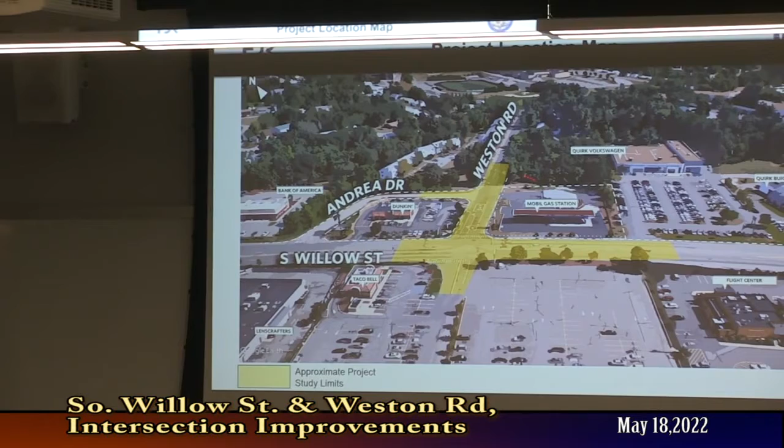What have we done? We had notice to proceed in October 2021 from the city. After that, we collected a bunch of traffic and collision data in November, and that is not correct. That's a year off, so that should have been November 2021 where the environmental letters went out. Apologize for that. The survey was completed in December of 2021, and then we held our local concerns meeting where we first met a lot of you folks back in December of 2021.

We have been pretty busy since then, collecting and analyzing data and speaking to folks in the field. As you can see, from January through April and into March, we met with some city folks to talk about drainage and requirements for drainage. We met with utility companies a couple of months ago in March out in the field, and we've had a number of abutter meetings where we've taken plans and we've gone and met with folks just to talk about their concerns, circulation on their sites, and how we might be able to improve the overall intersection operations. And we developed the purpose and needs statement last month, and tonight obviously we're here for the second public meeting.

So here's where we are in the project development process. We started out collecting traffic data and survey data. We solicited input in the local concerns meeting. We've crafted the purpose and needs statement. We've already developed a range of alternatives that we're going to share with you tonight. We've begun our evaluation of environmental impacts. That's going to continue in earnest after tonight's meeting, when we have a pretty good idea of what direction we're heading. And tonight we're going to receive public input on those alternatives. And after this, we'll be finalizing the recommended alternative to move forward into design. And we'll be looking for approval from the city and the state to move forward with that pending tonight's meeting.

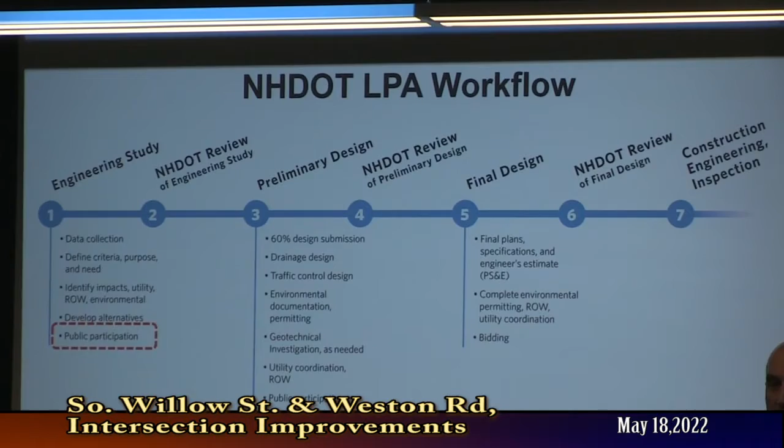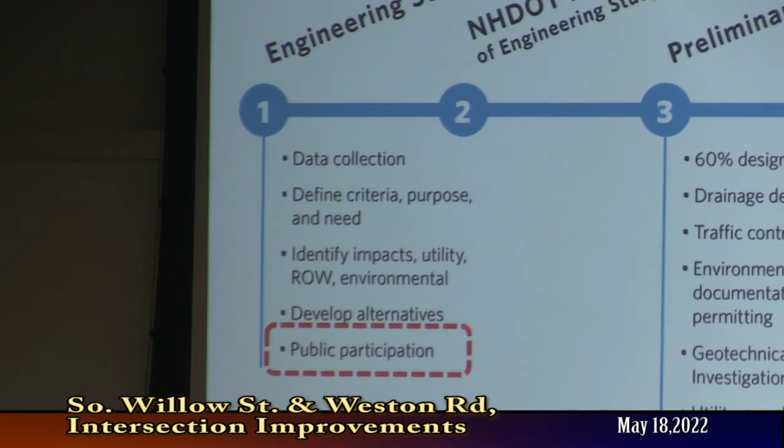This is the typical workflow. I think I shared this with you last time we met here. So this is as dictated by New Hampshire DOT and Federal Highway through their process. We're over here at the engineering study phase. These are all the different steps that we need to get through before we can actually build the project. So right now we're down at the bottom of the engineering study where we've done all of the studies, we've run through the analysis, we're developing a final report that's going to be submitted following this meeting tonight. And then we will be looking for approval of that engineering study before we move to preliminary design, which would be the next step where we really start putting pen to paper and finalizing the details of the project. What's the tentative schedule? We'll get to that. Okay. Thank you. So we're here right now.

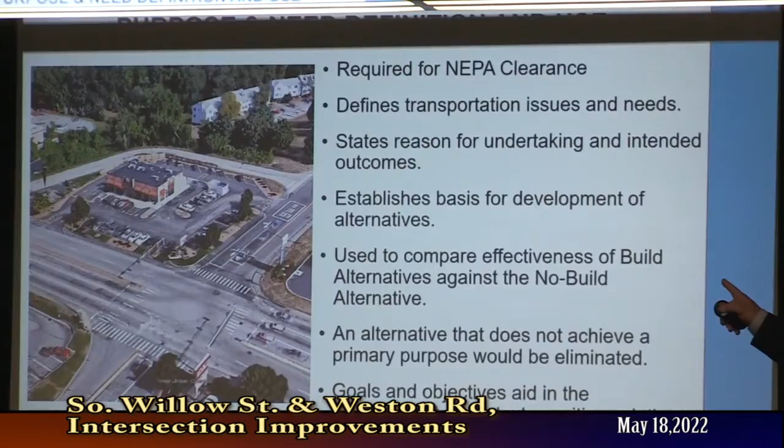So the purpose and needs statement that's been developed, this was developed in concert with the project team and the state regulators. You kind of get blacked out up at the top, but this is why a purpose and needs statement is required. It's required for NEPA clearance, that's the National Environmental Policy Act. So this is all dictated by some steps that we have to go through to get permits for the project. It defines transportation issues and needs that you all experience out there. And the purpose and needs statement states the reason for the project and what the intended outcomes are supposed to be. It also establishes the basis for alternatives. We just can't define what we want to build out there based on what we want. The alternatives that we select are really based on how it serves the public, how it serves the need, based on input from you all and the analysis that we're doing.

The purpose and needs statement is also used to compare the effectiveness of the build alternatives against the no build. We could do nothing, and that wouldn't change anything out here. The intersection would still operate like crap, and you wouldn't see any benefit to that. An alternative that does not achieve the primary purpose would ultimately be eliminated, and there is at least one of these in the set that we're going to show you tonight. The goals and objectives aid in the development of context-sensitive solutions. What does that mean? It helps us to find something that fits within the context of the community that we're serving, you all folks.

If you remember, this is a slide that we pulled out of the original presentation. The goals of this project were driven by the need to reduce air emission. If you remember, the funding for this project is coming through a CMAQ grant, Congestion Mitigation and Air Quality Grant, which the city was successful in securing from DOT and Federal Highway. And so the money is coming from them. That comes with certain requirements.

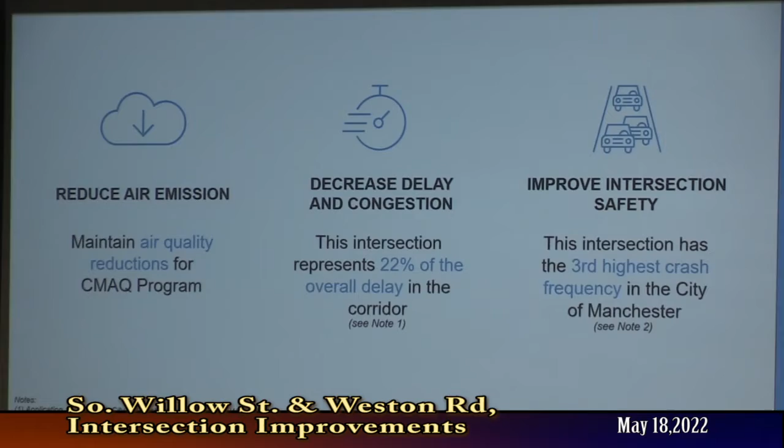That said, the city is also moving forward with another project that you may have heard about, and that's the Adaptive Signals Project, where they're making timing and signal changes all the way down South Willow Street to improve operations and traffic flow past the interstate and all the way up to Queen City Ave. Separate project, but we did have to consider it with this one.

And the outcome of that is improved intersection safety. As we improve congestion and traffic flow, the improvements to safety are there. We had to look at traffic analysis and crash analysis. You might remember last time we met, we went over the results of that and where a lot of the collisions occurred and reasons why. And so what goes into our design analysis is trying to find solutions to some of that. Largely, we answered a lot of those things with geometric changes.

So you might remember some of this. We took notes on a flip chart last time we met. We recorded that information and wanted to make sure that we brought it back here to identify what we're actually doing with it. These are the comments that were made in the last public information meeting. One of the problems identified was that the eastbound left queue on Weston Road at the Dunkin' Donuts driveway is problematic. Not enough green time to clear the intersection.

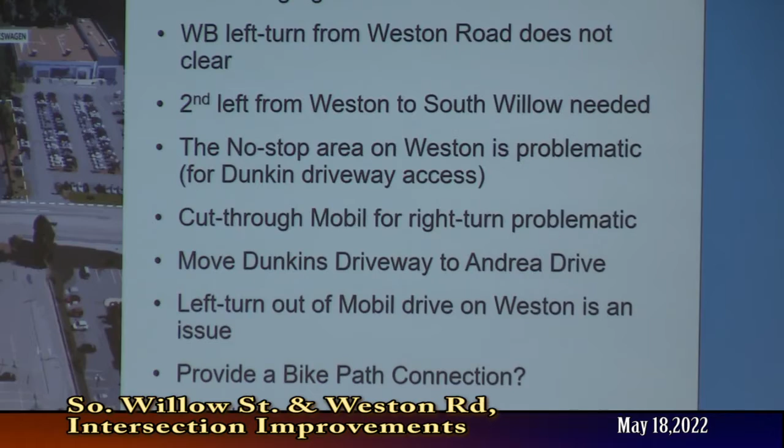The westbound left turn from Weston Road is not clear. So westbound, yeah, that's this one. And a second left on Weston Road is needed, so recommending a second left turn out of Weston Road here to help clear the traffic. That was one of the recommendations. Sorry, can you point to where you put that in? Right here?

This is the first meeting I've been to, and for whatever reason, even though we're abutters, we never got any notice. But anyway, so you've got the right turn lane going through by the Dunkin', and then coming off of Weston, you're gonna have a right turn lane, a straight lane, and a left turn lane onto South Willow, and then a left turn lane into the Dunkin's. Is that what you're talking about?

We'll go over some of that. We have some detailed plans that you can take a look at, and that information will also be made available on the city's website after this meeting, so you can look at it then too. I've got some detailed plans that will probably answer your questions.

But that comment right there was that in the meetings in the fall, people kept saying that we needed a second left off Weston Road to South Willow towards the highway ramp. So we were asked to look at how we can make it possible to get a second turn lane onto South Willow Street. So there would be two left turn lanes side by side? Yes. That was something we were tasked with looking at from the public comments.

What are you looking at, 6 foot wide lanes? These are comments that came from the public from the last meeting. We'll get to the alternatives that we looked at. Okay, yeah, go ahead. Thank you. The no stop area on Weston is problematic. This one right here, we have the paint on the ground in front of the Dunkin' Donuts. Yes. Nobody really pays attention.

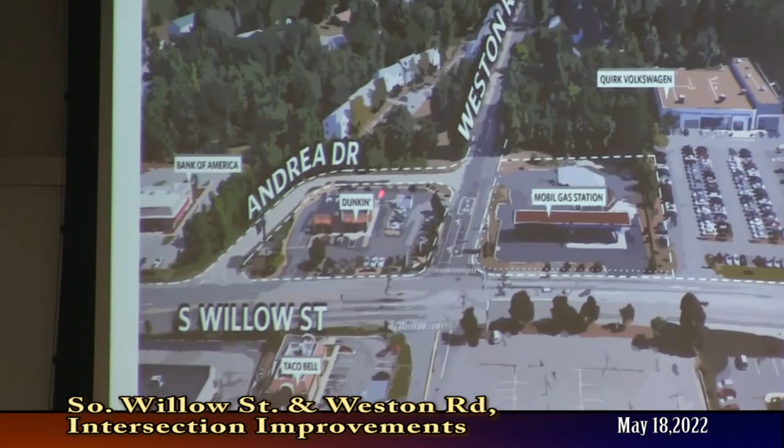Cut through the Mobil or right turn is problematic, so it's these people that go through the Mobil station. One suggestion was to move the Dunkin' Donuts driveway to Andrea Drive, putting it somewhere over here on Andrea Drive. This is a cut through that goes from Weston over to South Willow Street northbound.

Another suggestion was to make a left turn out of the Mobil drive on Weston. No, it said that that's an issue, so this movement, just the left turn out of the Mobil station, is an issue. Provide a bike path connection. Probably not something that we can address as part of this project because there really aren't any bicycle facilities on South Willow Street at all. And so to build something isolated at this location, it doesn't really serve a whole lot of function.

And if I can add a little additional context about the Mobil station with the left turn coming out of it. So we're in Brook Hollow. Okay. And I spoke to Roach. Did we speak earlier? Yeah. Roach? Yeah, okay. If I'm pronouncing your name right.

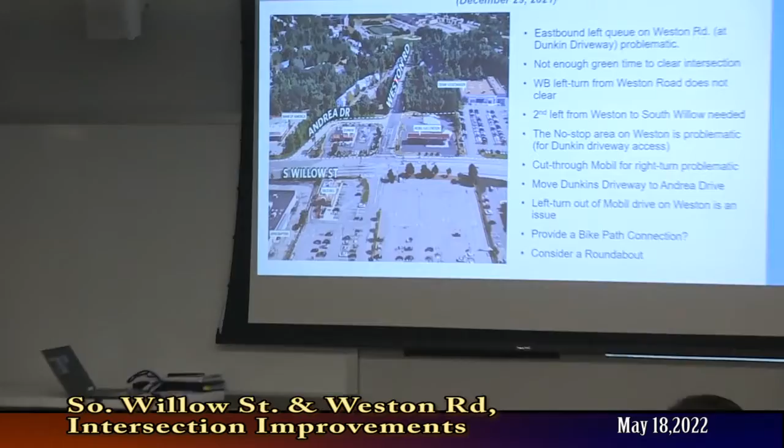Right, so people are making a right out of the Mobil and making a U-turn at our property. And it's quite a safety hazard. We got kids, they're coming in, they're whipping around in there because they wanted to make the left, but it's backed up. We've had one of our residents' cars damaged because someone backed into it trying to make the U-turn. And so we're taking steps to mitigate it ourselves with speed bumps and signage for private, no turnaround at the apron of our driveway. But anything that can be done to mitigate that would be greatly appreciated.

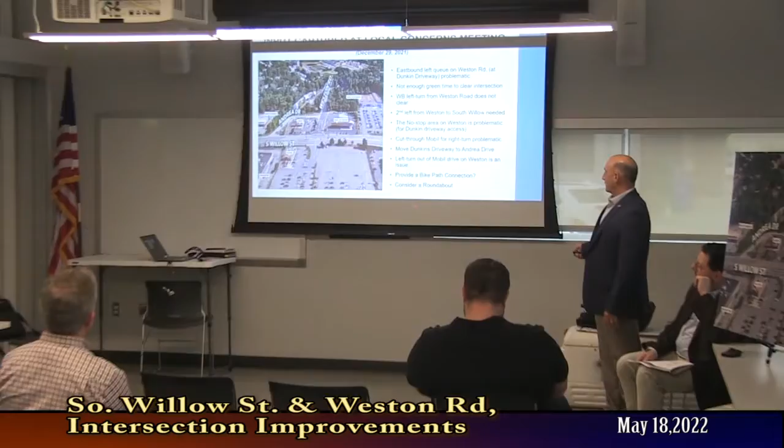No, and I appreciate that. I appreciate the conversation we had the other day about that. And consider a roundabout was one of the things that was suggested we look at for the intersection as well. So those are the comments that were received back in December. So those were all put in the queue, and we took a look at those as we went through our steps.

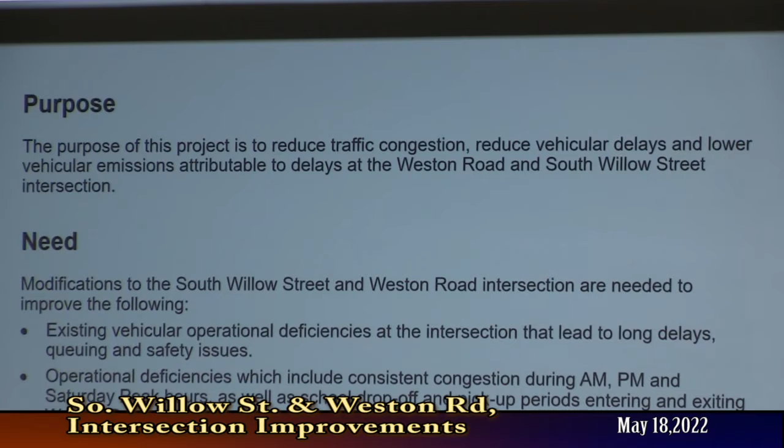So here's the purpose and need statement that was developed for the project. This will help guide us in our process along the way, and it's part of the requirements of the plan development process that we go through. The purpose of this project is to reduce traffic congestion, reduce vehicle delays, and lower vehicular emissions attributable to delays at the Weston Road and South Willow Street intersection. Very basic purpose that gives us our guiding principles, stemming from the funding that we have as well. The overall purpose of the project is to reduce emissions at the intersection. We do that by improving traffic circulation at the intersection so that people aren't sitting there as long.

The need is driven by: modifications to the South Willow Street Weston Road intersection are needed to improve the following: the existing vehicular operational deficiencies at the intersection that lead to long delays, queuing, and safety issues. So the need stems from the purpose. Operational deficiencies, which include consistent congestion during AM, PM, and Saturday peak hours, as well as school drop-off and pickup periods entering and exiting Weston Road. Lastly, congestion and delays attributable to increased vehicular emissions from idling vehicles. So that defines the purpose and need statement for the project. Kind of what we already talked about, what we laid out.

What you can't read up here, it's blocked out, is that these are some additional goals and objectives that were identified that aren't necessarily part of the purpose and need statement, but are obvious things that should be considered as we move through the project. So obviously, we want to improve the operational flow and decrease vehicular delay within the intersection. That leads to what we already talked about. We want to minimize project impacts on local business operations, natural and cultural environmental resources. It's a very tight area.

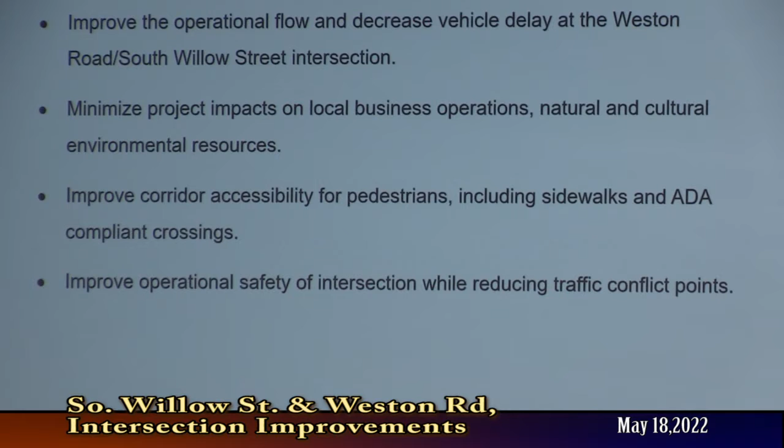There's a lot of businesses, as you know, from the Dunkin' Donuts to the Mobil station, the mall across the way, and Corcado. So our job is to try to do as much as we can within the right-of-way that we have, within what is owned by the city, work within those limits to the extent that we can, and make as many improvements as we can to the intersection while maximizing that space and minimizing costs. Improve corridor accessibility for pedestrians, including sidewalks and ADA compliant crossings. So that's part of the design. We're making some improvements to some of the pedestrian ramps, looking at the crosswalks. The signals that are going to be included, you'll see later, are going to provide some improved pedestrian crossings there as well.

Improve operational safety of intersection while reducing traffic conflict points. You'll see through the geometry that has been laid out, what we're trying to do is consolidate points of conflict, where right now you have the Dunkin' Donuts driveway, you have the Mobil station, you have Andrea Drive. All of these are points of conflict with multiple lanes that people have to cross over that result in a lot of the collisions that you see out there today at various severities.

So, to your point, your question, here's the alternatives that we're evaluating. So I'm going to show you a range of alternatives that we walked through. And on those alternatives will be a list of advantages and disadvantages as well that we use to evaluate them for viability as we walk through.

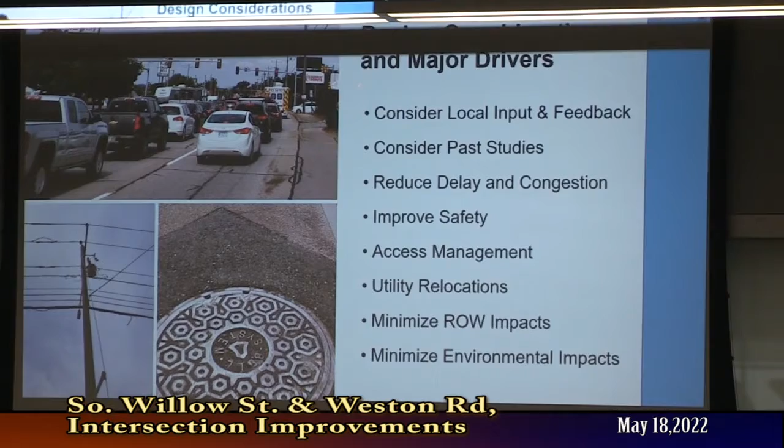So what do we use to evaluate the intersection alternatives? We're looking for local input and feedback. We considered the past studies. We walked through some of this last time we met. Reduce delay and congestion. We're looking for something that improves safety. Access management, what does that mean? How people come and go out of driveways, how they access the public road. That's access management. Utility relocations, we're trying to minimize what we're doing out there, albeit we are going to have some utilities to relocate. There's some poles that have to move.

Minimize right-of-way impacts. Obviously, we want to minimize any issues with the abutters out there and minimize what we're doing to impact operations of those businesses. And minimize environmental impacts. So those are the overall drivers of the alternatives that we put together and the things that we look at with each of those alternatives.

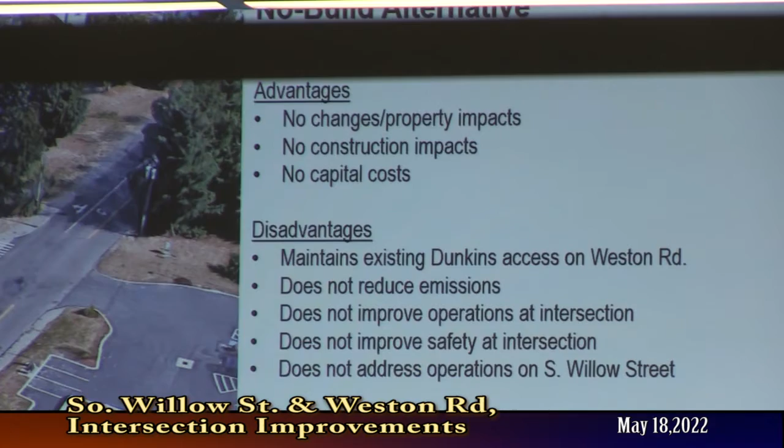So you can see up here, this is the no-build alternative. So what does the no-build alternative do? It does nothing. You would walk away, you'd have the same condition out there, but this is something that we have to look at. And we compare the alternatives that we're developing against the no-build alternative. So what you'll see later on in the presentation is we have metrics to define that. Traffic data, delay, queuing lengths, and we measure the no-build versus the alternatives and see how things perform. And that's part of what goes into selecting the preferred alternative.

So what are the advantages? No changes or property impacts. Yay, right? No construction impacts. Yay. No capital costs. Those are the advantages. What are the disadvantages? Maintains the existing Dunkin's access on Weston Road. Does not reduce emissions. Doesn't satisfy the overall goal of the project out of the purpose and need. Does not improve operations at the intersection at all. It would just continue to get worse as we go from 2023 to 2033 and beyond, and traffic continues to grow.

Does not improve safety at the intersection. So the geometry remains the same, conflict points remain the same, just maintain what you have. It does not address operations on South Willow Street at all. So again, that 22% contributing to the overall congestion and delay on South Willow Street, nothing would be done about that. So this is alternative number one that we looked at.

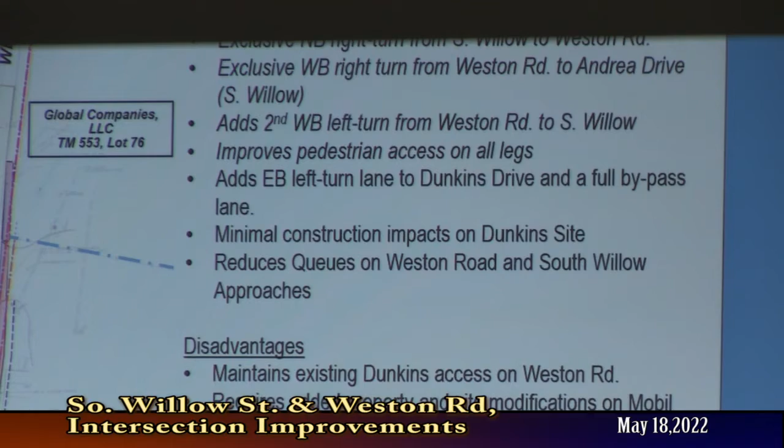I'm trying to figure out what the first one is. Exclusive right turn from South Willow Street to Weston. Thanks, Steve. That's why we print. Okay.

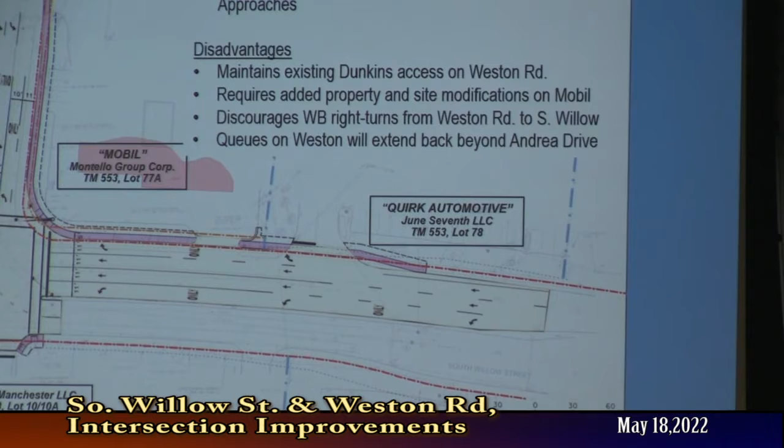So I'll explain a little bit about the graphics, and then this will apply to all of the alternatives. So you'll get an understanding of the color scheme that we have up here. Not always easy to look at, totally understand. Start with the red. So red lines, that reflects the public right-of-way. So that's the limit of what the city owns and what we define the parcels around Dunkin' Donuts. So you see Dunkin's here, that's the map and lot number. So that's the Dunkin' site. Blue is going to be the property line that separates the condominium property over here, Hollow Brook, from this parcel over here. That's the blue line, which is the property line.

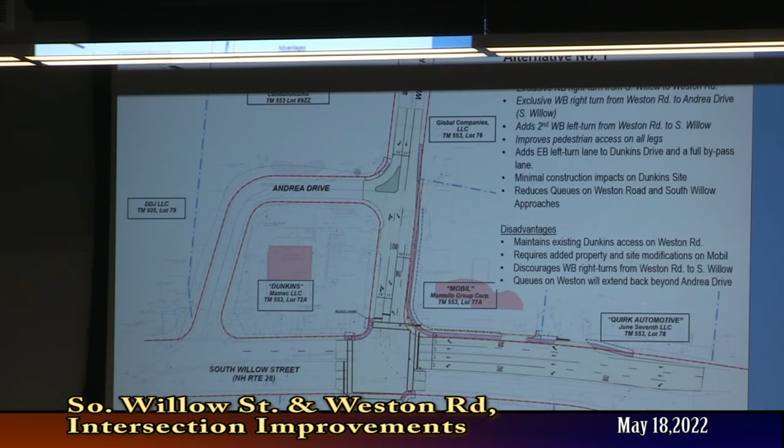Over here you have Global Companies and Mobil. I believe these are two in the same ownership. That's a property line that goes between these two parcels. Here you have this property line here, which is the split between Quirk Automotive and the Mobil station here. And then down below you have Centrico Manchester. This is the mall area. These two parcels are owned by the same company, and that's the entrance to the mall across the street, and the Taco Bell.

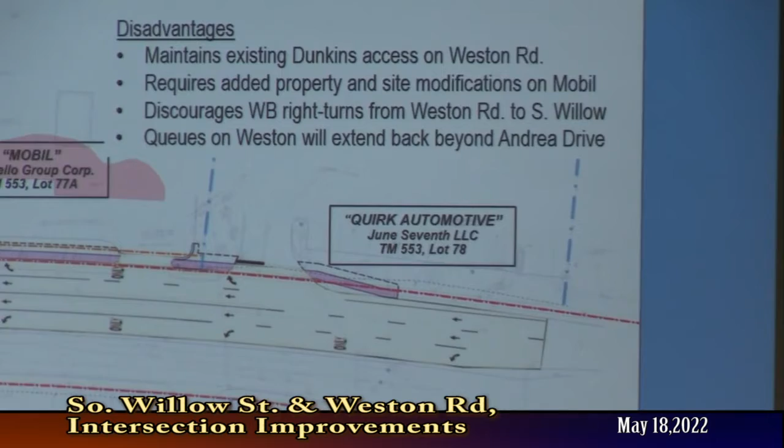And again, you have right-of-way in red here, and what might be difficult to see is there's also an orange line here that sits behind that, 10 feet behind the red line here, 5 feet behind the red line here. What that does is it defines an easement that has already been secured by the city from the Mobil corporation when they redeveloped this site. What does that mean? It's an area that is encumbered by the city for future widening of South Willow Street and Weston Road in this area. So that to us becomes something that we strive to work within. That land has already been dedicated for this future widening, so we're trying to work within those limits.

Green would be a raised island or an island. It could be like a concrete island, possibly flush, possibly raised. Haven't really gotten into that yet. Yellow is kind of a faint yellow coloring here. That would be new pavement, new asphalt, blacktop. So that really defines the limits of the project and what we would be resurfacing for the roadway. Then you see pavement markings here, arrows and onlys. So you see lane use here that would define where cars go. I'll get into a little bit more on that.

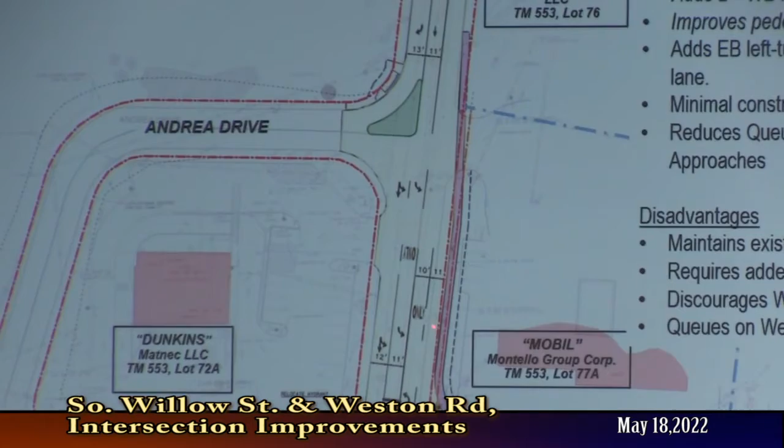Purple along this side would be a reconstructed sidewalk all through here. So you can see it flanks the other side of the new curb line for the roadway. And you also see purple over here on this corner. So we'd be looking to reconstruct that corner ramp system and actually separate that crosswalk from this crosswalk to make it a little bit safer. We really like to stay away from putting them on the corners like this, because as vehicles go around the corner, it's not very preferable from an ADA perspective. So we'd be improving that ramp there, that ramp there, that ramp there.

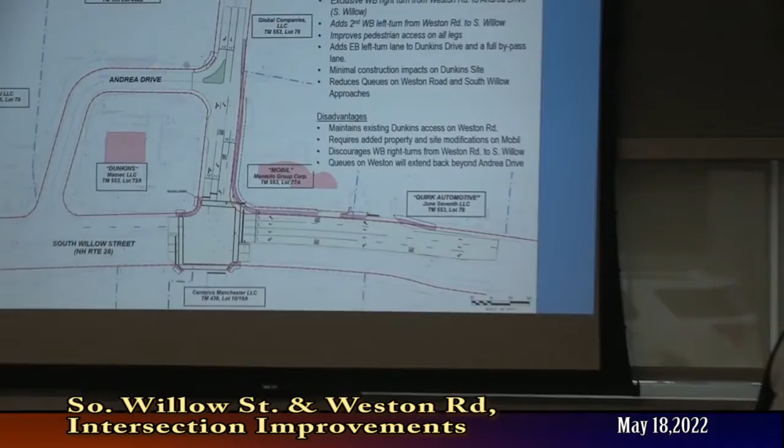And then obviously you have the public right-of-way on this side of South Willow Street, and we're not really doing anything at all over here on this side. So this would be all new pavement here and here. Questions on that before we go any further? This is really going to apply to all the alternatives, so I'm not going to spend much more time talking about color.

So, it's hard to see it in the plan. It's the only egress to Dunkin' Donuts now over Weston. It's also South Willow, you can go in. The Dunkin' Donuts wouldn't change in this alternative? Yeah, both of their driveways are still there. We'll get into what the improvements are associated with this. That was really an overview. The red here are the buildings and the canopy for the site. So this is the Dunkin' Donuts building, and this is the canopy for the Mobil site, just to orient you a little bit more.

Under this alternative, I already forgot. What's that first bullet? Exclusive northbound right turn from South Willow to Weston Road. Am I crowding?

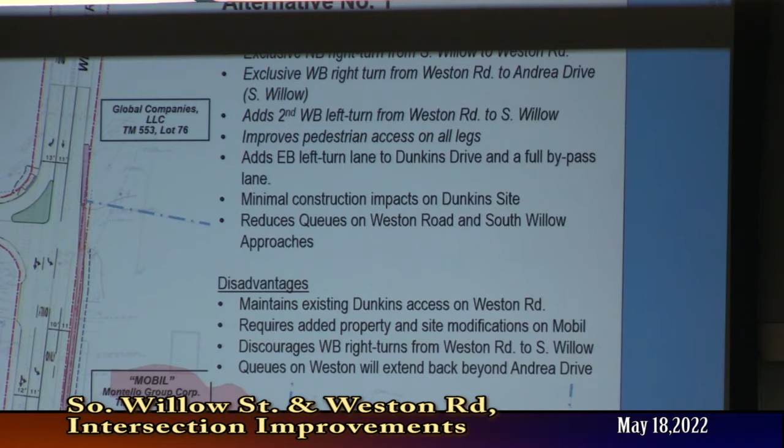So all of these alternatives have some things that are common to all of them. In all of the alternatives, there is a westbound right turn lane from Weston to Andrea Drive. I take that back, not exclusive. In this alternative, there's this exclusive right turn lane from Weston Road to Andrea Drive. The purpose of that is to pull right turning traffic out of this intersection here and to push it to this intersection here. Why would you do that? It pulls vehicles out of the intersection, improves delay, improves operations of the signalized intersection here, forces them onto a road that is highly underutilized at this point. It's really just a U-turn cut through for local traffic. So that's one of the things that we did.

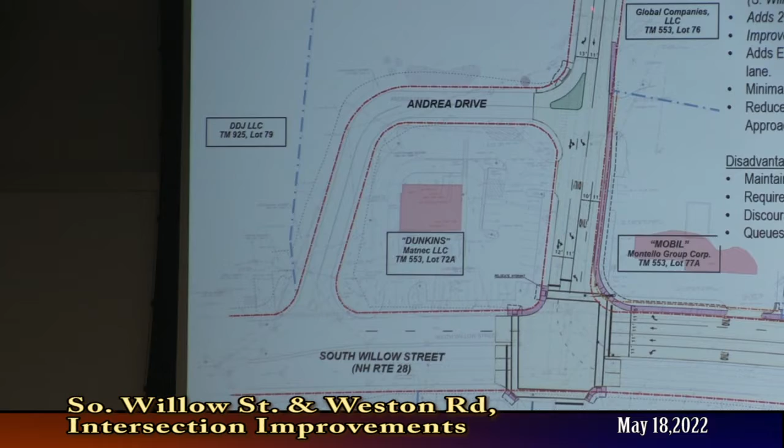We can do this because we have 2 lanes approaching on Weston Road this way. So it would actually be signed up above towards the condominiums for people to take that right turn, split the traffic, and then you have a single lane coming through here that would then open up to 2 lanes here that would ultimately make 2 left turn lanes onto South Willow Street here. So that's how we get the 2 lanes to work. We do that without impacting the sidewalk on the Dunkin' Donuts side.

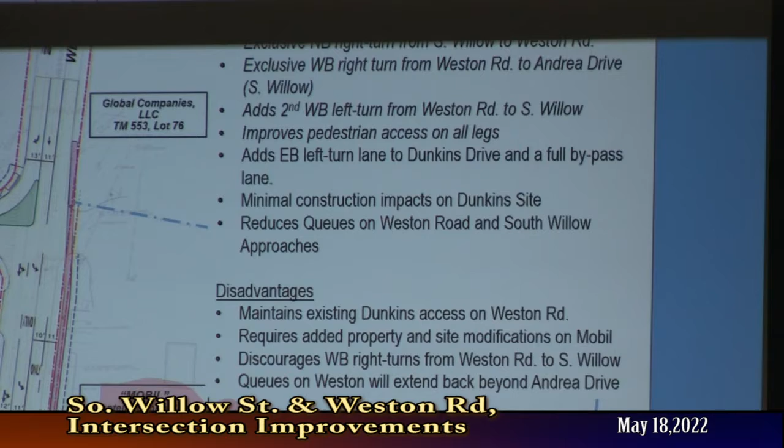Where the Brook Hollow condos are, how far back would you have to take the land to create the exclusive right turn lane? We're not taking any land. So it's just that corner in front? We're working within the existing roadway in that area. We'd basically be restriping what's there, not touching the curb line at all. And then what about the opposite side? It looks like you'll be taking a little bit on the opposite side? Yeah, you're way ahead of me. Okay, so.

Just trying to understand, because people already do make 2 lanes out of that as is. So this would be formalizing an action anyway. Yep. It's a good idea. All right, so 2 left turn lanes.

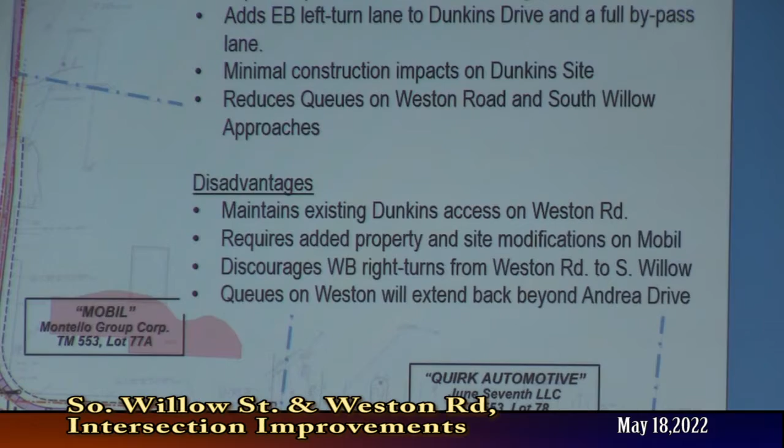This alternative has this formal right turn lane here. Right now you don't have a right turn lane making that right from South Willow onto Weston Road. All the alternatives that we're going to show you have this same option here, or not an option, but we'd actually be widening the road along the Mobil station property here to add a lane, an 11-foot right turn lane, so that you could unimpeded make that right-hand turn. And that pulls that traffic out of the 2 through lanes here on South Willow Street as well, and helps move traffic through the intersection, further reducing delay.

So in that case, there is widening along this side of South Willow Street. We would build a sidewalk behind that new curb line as well. And there would be the need to move utility poles on that side as well. There's a couple of good-sized utility poles up there. We're looking to move those back. And the permanent work would be done within the easement that I talked about earlier that is already secured by the city of Manchester. Back to the property line here.

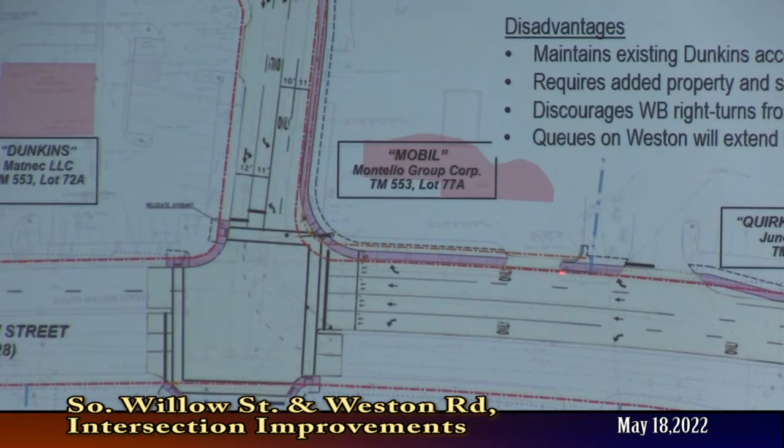This alternative and all the others also carry that right turn lane back onto the Quirk property. And you can see in this area here, we would actually be working beyond the right-of-way, that red line, and that would require an action with Quirk, for the Quirk property to actually secure some property rights in this area here to make that happen. So there'd be a minor adjustment to the curb line into this driveway access here that I think is largely an egress and exit from Quirk. Let's see.

On this side of Weston Road, this proposal keeps the Dunkin' Donuts driveway where it is, so it wouldn't change the Dunkin' Donuts driveway at all. But what this alternative does is it provides a left turn lane into the Dunkin' Donuts here and a bypass lane from that. So if somebody's waiting to take that left turn into the Dunkin' Donuts, it'd be another lane where people could drive right by them and keep going. So that's the intent. And beyond that would be the purple sidewalk over here.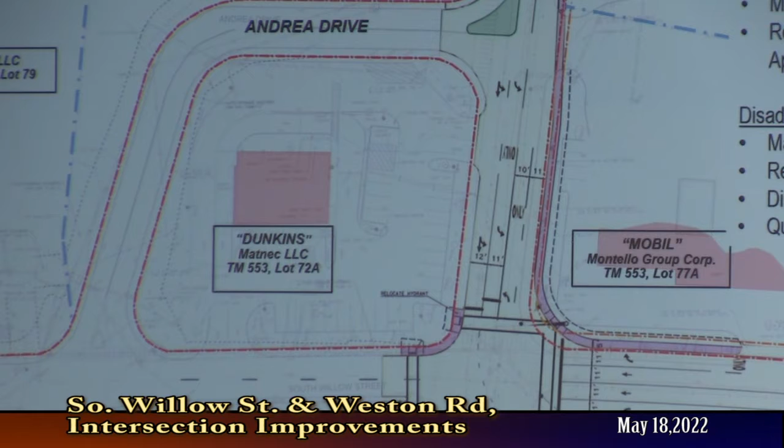The distinction of this one is that with the additional lane here, your instincts were correct, you need to look at purchasing additional property here beyond the easement that's already been established on the Mobil property. So it'd be more widening that would exceed the available right-of-way. Okay. So that, again, maintains the existing Dunkin' Donuts driveway where it is.

One thing I'm also going to state that is true for all alternatives is this corner here. Because all alternatives have the right turn lane going in, and there'll be new signal equipment here, we have to push the signal equipment back to make that right turn lane. There's the need for additional property impacts on this corner here. Hopefully you can see this orange line here. And the work extends beyond that, so we can actually make the turn and build the sidewalk beyond it. And so there'll be some additional impacts on the Mobil property site as well that we would need access rights for.

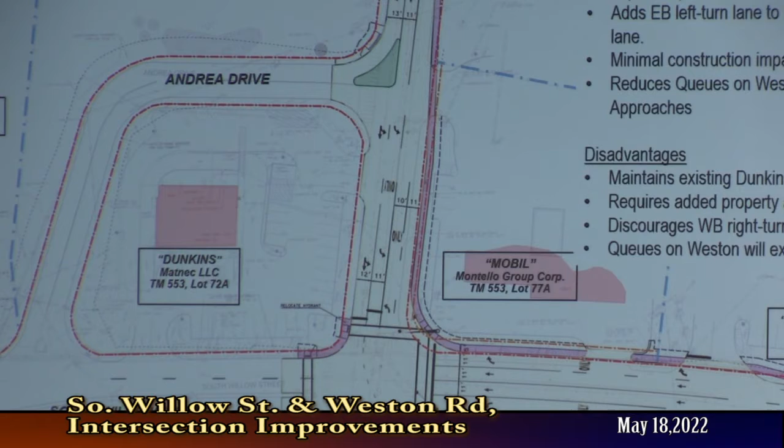All right, so let's go through the list. Exclusive westbound right turn from Weston to Andrea Drive here. Adds the second westbound left turn from Weston to South Willow. That's this one here, so the two lefts. Improves pedestrian access on all legs. That's because we're improving all of these ramps here. Adds eastbound left turn lane to Dunkin' Donuts Drive and a full bypass. That's this left turn lane and that bypass here. Minimal construction impacts to the Dunkin' site, so we're really not doing anything at all on the Dunkin' site. Reduces queues on Weston Road and South Willow approaches. We'll show you the traffic data results of that after, what that means, and how that performed.

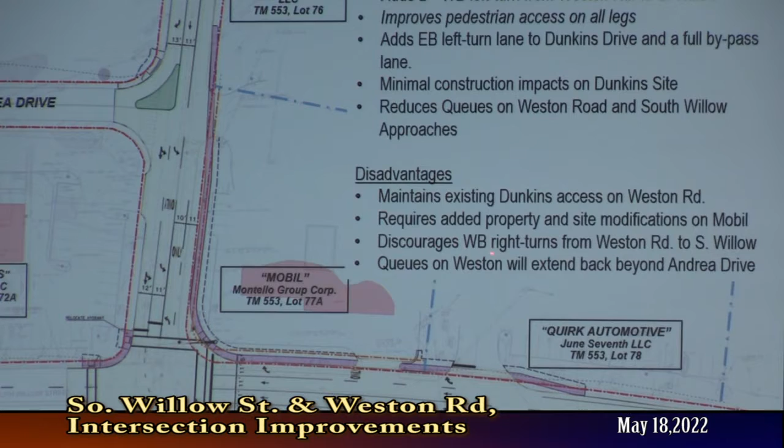The disadvantages: it maintains the existing Dunkin's driveway on Weston Road. Requires added property and site modifications on Mobil here along this stretch on Weston Road. Discourages westbound right turns from Weston to South Willow. That's this movement here. So if people get trapped here, they will still be able to make that right turn, but we're discouraging it and trying to encourage people to make this right turn to head points north on South Willow Street. Okay.

So would you put another traffic light at Andrea then, to make it easy for people to do that? You anticipated my question.

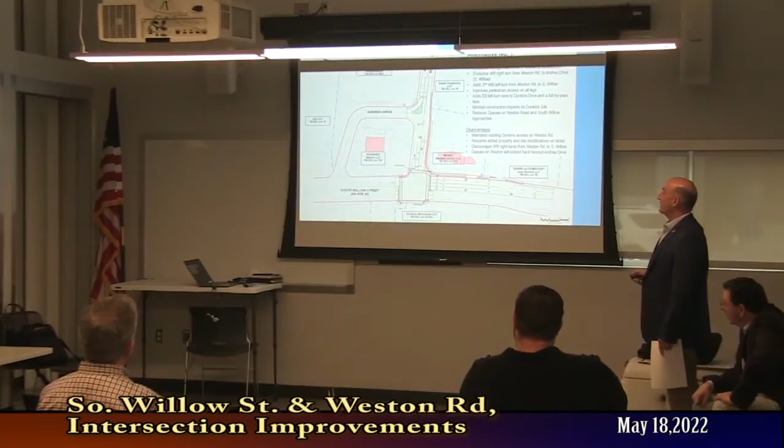The answer is no. Yeah, we talked about that the other day, talking about a traffic light actually on Weston, not the Andrea. Oh, so here? That's a different issue. Yeah, because people end up waiting. So I guess the timing of the traffic lights themselves would need to be adjusted to make it easy for people to be able to make the right coming out of there.

You're very wise to ask the question. This would remain an unsignalized intersection here. There would be an impact on folks who come here to make that right turn to get onto South Willow Street. Operations of those folks, they'd still be able to get out. There would be appropriate gaps for them to be able to get out based on the signal timing and operations, so that as these folks are making this left here, that clears this area for them to actually make that right.

So you'll see that in the traffic, as the two lefts are coming out here, there's nobody moving this way on South Willow Street. Right. And similarly, as these folks are making this left turn here from South Willow onto Weston, there's nobody on this part of South Willow Street. So that provides reasonable gaps for people to get out. There is no signal proposed in this intersection here. Yes. All right, that makes sense, because as that flows better, it's going to create easier egress over there.

And as discussed earlier, the other part that the city is doing is making modifications to the signal systems all along South Willow Street. We've considered that in the analysis as well. And so the results that we have consider those operational improvements. So hopefully when all of this is said and done, you'll see nice progression through South Willow Street. All right, that's alternative one.

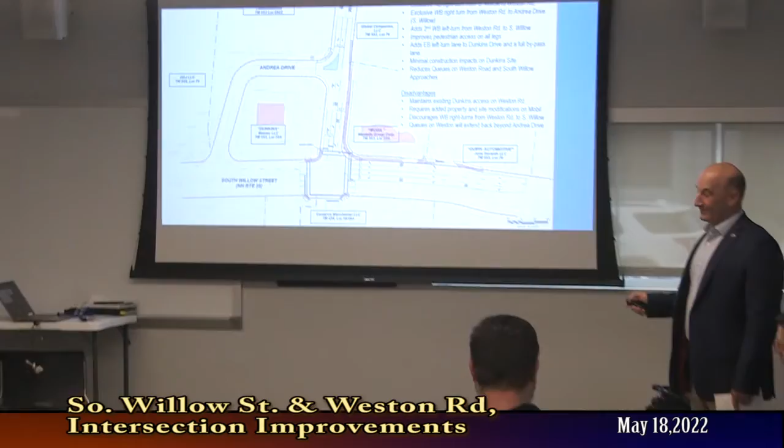Just a quick one. Sure. The exit coming out of Mobil onto Weston, would you still be able to cross over straight, or would that raised area? That's a great question. This is something in final design we would have to work through, and it's most likely this island here would have to be pared down to allow that movement to take place.

All right, alternative two. Bullets that you can't see up here are the same as the previous alternative number one. All this italicized stuff up here are the ones that carry over. Remember I said each alternative has very similar characteristics, including this right turn lane here. That remains the same. We still have two lefts coming out of Weston onto South Willow Street.

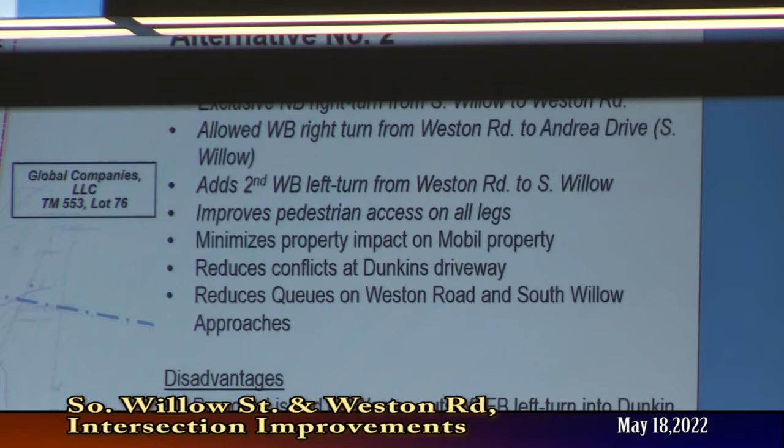And the difference here, and this is a big one, is that this alternative would propose an island here, a raised median island. What would that do effectively? Well, it keeps people from turning into the Dunkin' Donuts here. It eliminates that conflict point and helps to deal with the operational issues of the intersection and also the safety issues with the collisions. We'll get into the disadvantages in a minute.

What that also does is we would only need a single lane coming up through here. You would still have folks who would be turning onto Andrea Drive if they wanted to circle around. But primarily, you just need a single lane approach to come up here. And that results in no significant impacts on the Mobil property over here. We're still not doing any work on the Dunkin' Donuts site with this one.

What are we still doing? We're still improving pedestrian access on each leg. We're still improving the signals. We'd still be building this sidewalk over here, resulting in some impacts on the Quirk property as well as the Mobil property to move the poles back, move the sidewalk back, put in the right turn lane, and we would still be impacting this corner here, requiring some property rights to make the right turn lane work.

Disadvantages: the proposed island on Weston cuts off eastbound left turns into the Dunkin' site. You can't do this anymore. So think about that from a business and an impact perspective. They don't like that. It's going to create a new kind of accident anyway. People are going to go by the sidewalk.

So this is one of those things where, from an operational perspective, when you're considering just traffic and operations, it makes perfect sense to restrict access. From a contextual point of view and how it works with the local community, it doesn't work very well, because you can't get into the site, and you also can't make this left turn out of the site. So how do you get in? You're relegated to this driveway over here, and this driveway would be right in and right out only.

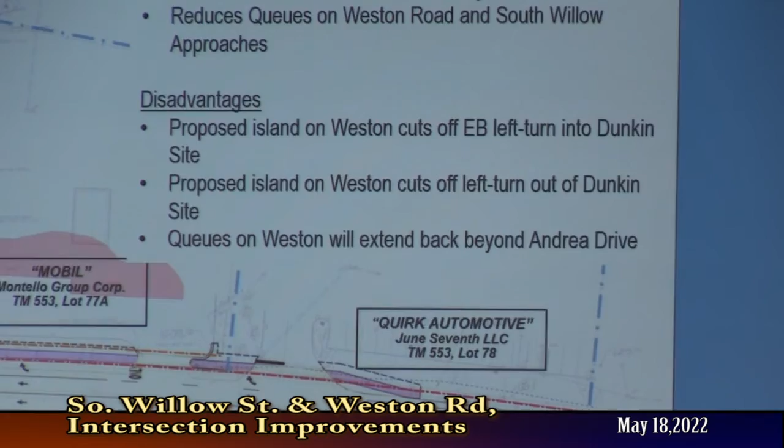That's alternative 2. Do all the options on that right turn lane, can the WB50 make that turn? Great question. We did look at that. The answer is yes. It improves the radius, so it's substantially better for the buses too. So that's one of those design things that we looked at. Something not working very well.

Sorry. That's why this corner has to widen out, because we look at that truck turning, making that right. And from a design perspective, we like to have that maneuver made without encroaching into these lanes over here. We don't want to put the front end of a truck into the front end of a Camry waiting to go the other way. That's why this gets widened out. So we looked at all the alternatives relative to that. It works well. We looked at buses. We looked at large vehicles, large trucks. Great question.

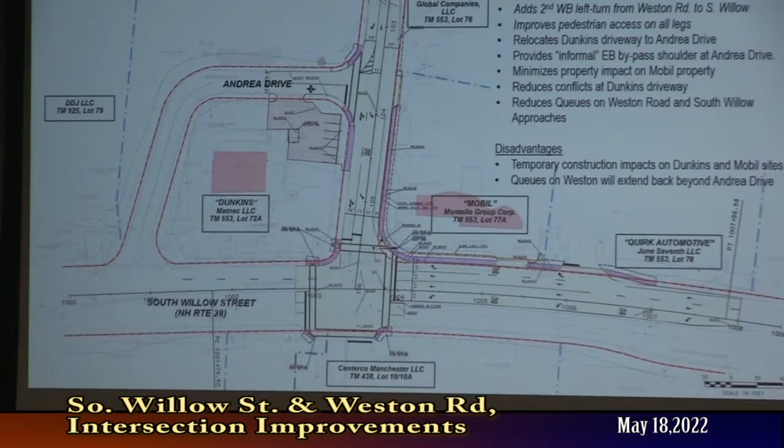Alternative 3. So this one looks a bit different. The right turn lane is the same. That doesn't change. We still end up with the same level of impacts here on the Quirk and the Mobil site. It still provides that right turn, provides the wider throat here to facilitate trucks making that corner without encroaching into opposing lanes. Still makes these sidewalk improvements, the ramp improvements, new signals at the corner.

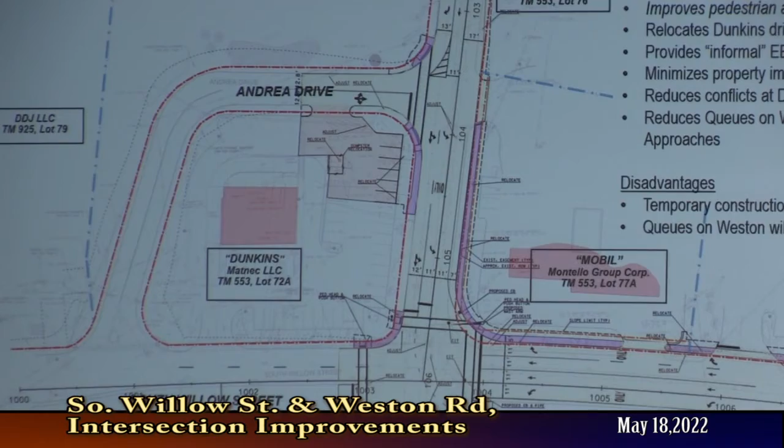So what's different? We are not forcing people to take this right, but similar to the first alternative, we're going to strongly recommend that people who are northbound on South Willow Street take that right if they want to continue to points north and bypass this intersection. So we would sign it and stripe it that way, and that pushes these folks this way, same as the other alternatives. You end up with a single lane approach coming through here, opening up into 2 lanes, and again, you get the 2 lefts. It would still come off of Weston Road onto South Willow.

So that doesn't change. What does change is we have an 11-foot through lane coming through here, and it's flanked by a 7-foot shoulder that can be used as an informal bypass lane. Why is that important? What we're going to do also under this alternative is close down this driveway access on Dunkin' Donuts and put it over here on Andrea Drive.

So you see in orange over here, there are certain modifications that would be made to the Dunkin' Donuts site that would reconfigure some of their internal operations. We'd give them a couple more parking spaces, but would close this driveway down, so that no longer becomes a conflict point for people on Weston trying to make that left. What we would do instead is push those folks to this intersection here, which is 150 feet away, eliminating that conflict point and putting them into a more formal intersection, so people would recognize it more as an intersection.

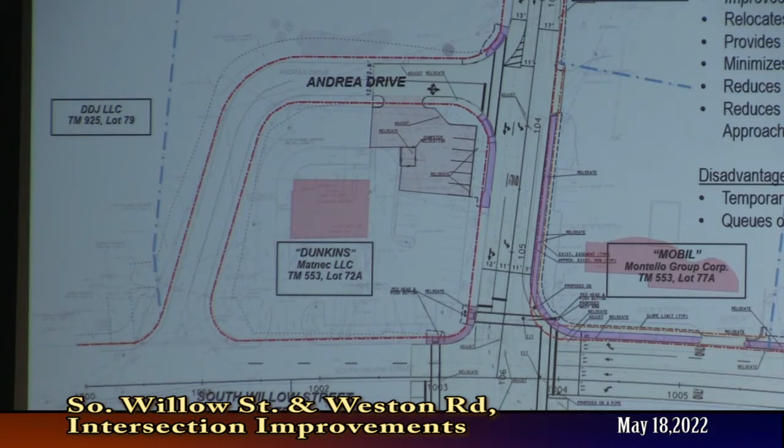And so folks sitting here, waiting to take that left to get into Andrea Drive and into the Dunkin' site, that 7-foot shoulder would be there so that people could get around them. It's not formalized, it's an informal shoulder that allows enough width for people to get by. And the reason we looked at this was to minimize property impacts on the Mobil property. This allows us to do all of the permanent work on this leg of Weston Road within the easement that was acquired. It's right basically at the line.

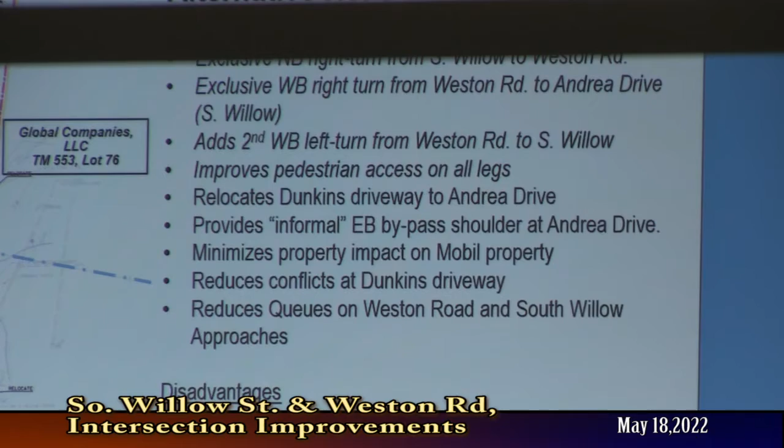So we'd still have to look at grading impacts on that property and still secure temporary rights to get on and do the work. But permanent work on this leg would be within the easement limits. We still need to look at property rights here and here for this alternative. So the big change with this one is putting the driveway on Andrea Drive. We have met with the folks over at Dunkin' Donuts. They're amenable to this. They understand that it serves a lot of purposes by helping people to actually get into their site more safely, and ultimately will help.

This allows for full, it also lines up the Mobil station driveway up here. One of the things that we like about this alternative is it creates a more formalized intersection here with the fourth leg being the Mobil station driveway. More recognizable as an intersection, allows folks to still do this while only really crossing a single lane here as people are approaching this intersection instead of the 2 lanes that approach it today.

It also makes it more recognizable from a driver perspective. We like driver recognition. That's one of those things that we like to see, like to know. Are people recognizing it as an intersection? And doing away with this conflict point here is a major safety improvement, just eliminating that one conflict.

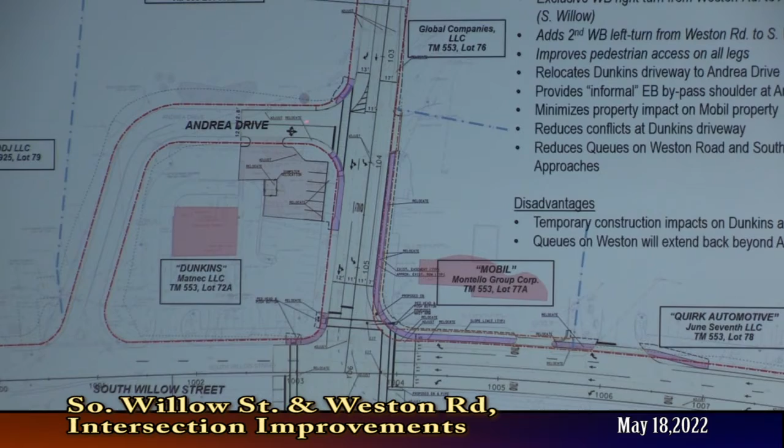How do you get into Dunkin' Donuts? You would come this way here, circulate around to the drive-through, and then circulate back out here, or circle around the building and come back out this way. You can either make a right-hand turn here or a left-hand turn here. Miss anything? Okay. All right, let's go through the bullets.

All of this stuff is the same. You get the right turn from Weston Road to Andrea Drive. Adds the second left turn lane from Weston to South Willow. Improves pedestrian access, relocates Dunkin's driveway to Andrea Drive, provides an informal eastbound bypass here. Eastbound is up. Minimizes property impact on the Mobil property, so their sign, their vacuum systems, we'd be looking to minimize impacts of that stuff.

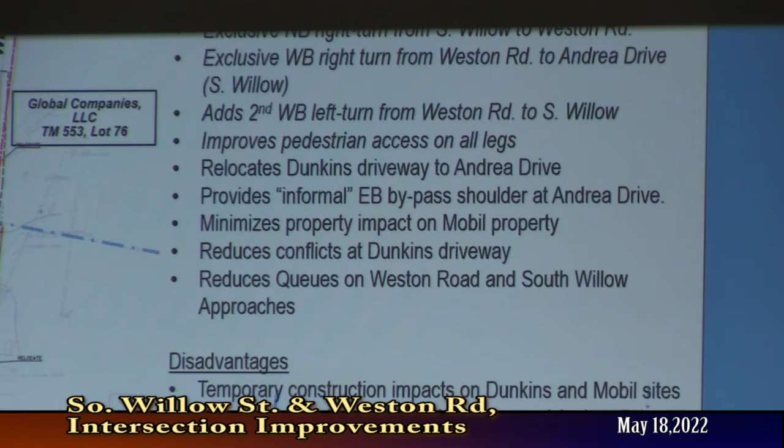Let's see, reduces conflicts at the Dunkin's driveway here by closing that driveway. Reduces queues on Weston Road and South Willow. What's the disadvantages? Temporary construction impacts to Dunkin and Mobil sites. That's really for all of the alternatives that impact those properties. Queues on Weston will extend back beyond Andrea Drive.

So what all of these alternatives do or don't do is, when you look at the traffic projections, we are processing a lot more volume out of this by adding the second lefts. You're still going to have traffic backing up to some point in here. It's much better though. When we show you the numbers, you'll see the major reduction in traffic queuing. Queuing is how far those vehicles back up the road.

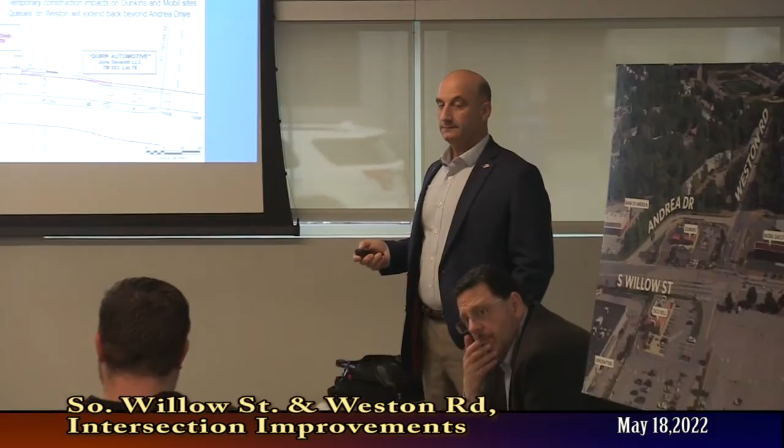Yeah, looking at that, I'm sitting here thinking with the issues that we have at our place, my preference might be to actually take that right turn lane all the way back to our driveway entrance to try to clear the backup there and not block the driveway or the box in front of our entryway so that our residents can get in and out.

At peak times, that right lane, even if people are already queuing up to make a right, with the 2 lanes, it still blocks off our driveway where people can't get out. Like after school time and stuff like that, when it's pretty heavy, Saturday mornings. Understood. Maybe what we can do following this meeting is have a follow-up with the city as well and see how that would work into this project, what that would mean as far as scope of work and how far it would go outside the project area.

And I've already interrupted you. Have there been conversations with the Dunkin's and Mobil about taking more of their land to do any of this stuff? Like, has there been resistance? Preliminary discussions, like, we already do have the easement on the Mobil, we've had preliminary discussions with all of them.

This is a federally funded project, so we're required to follow the Uniform Act, get appraisals and offer appropriate property values for whatever temporary and permanent easements that we need for takings in these areas. So we've had initial conversations, no one is opposed to what we're proposing so far. So as we get into the design, we'd actually get into the details of what it'll take to get to that conclusion. That includes the additional land that was discussed on the Mobil, yeah? Yes. Okay. Did I answer your question? Yes, thank you. Great.

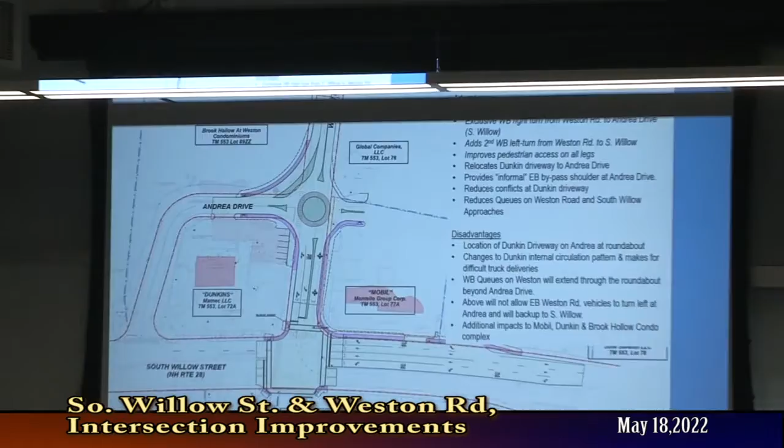All right, one more. So one of the comments that came out of the last meeting was a roundabout. How would that work? So we looked at it. So all other things equal, we still have the right turn lane here on the Mobil station. It extends back to the Quirk property. None of that changes. None of the intersection up here changes. We would still have double lefts coming out of Weston Road onto South Willow Street. None of that changes. We would have a splitter island here, so really similar to alternative 2 that we looked at earlier. The driveway on Dunkin' Donuts would be closed, and that would be relocated back to Andrea Drive.

This would be narrowed to a point where property impacts may be limited at this location, but you can see there would be other impacts up here. So where does it vary? The footprint of a roundabout is significantly larger than just an intersection when we looked at it, just to make operations work. So if we were to move forward with this, this is probably what the geometry would need to look like. A couple of things to note here.

We talked about the red line being the right-of-way lines, right? So you got here and here. This boundary here represents the limit of Brook Hollow condominiums. So that's this property over here. To make this work and to carve out that space for those right turners in this area, we'd be looking at a significant property impact here on Brook Hollow, which we're not seeing on any of the other alternatives

that still perform adequately. Same thing on the Mobil site, we'd be looking at probably some significant additional impacts here. And this would also impact their internal operations of how they function internal to the site. So there would be additional impacts here.

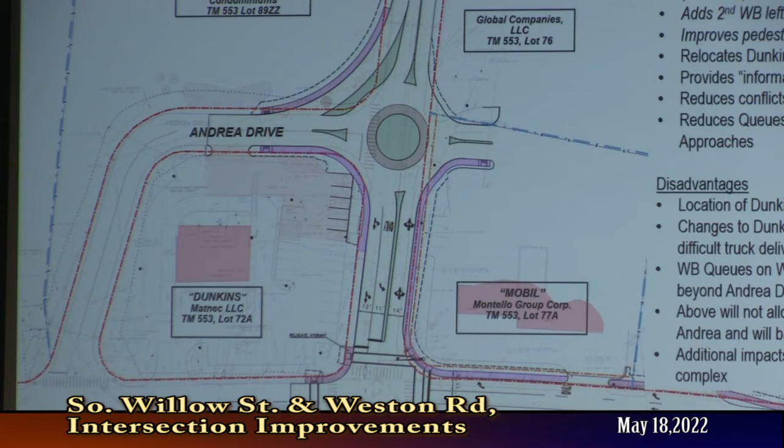The big thing about this alternative, though, that is problematic is that as we look at the queuing for the vehicles that would continue to stack up through the intersection back to some point back here, although significant improvements over the existing condition and what we're seeing 10 years from now, if you have vehicles stacking up through the roundabout and through here, anybody who's coming up here to take a left to get into Andrea Drive, the Dunkin' Donuts site, would not be able to make that movement. They'd be stuck in that roundabout.

And that's problematic because those vehicles would end up queuing back here and spilling out onto South Willow Street, and we'd end up with something very similar to what you have today. So we'll run through the bullets. All of this stuff is the same. Relocating the Dunkin' driveway, provide the informal eastbound bypass shoulder at Andrea Drive. That's not right. Reduce conflicts at the Dunkin' driveway here by eliminating the driveway. We reduce queues on Weston.

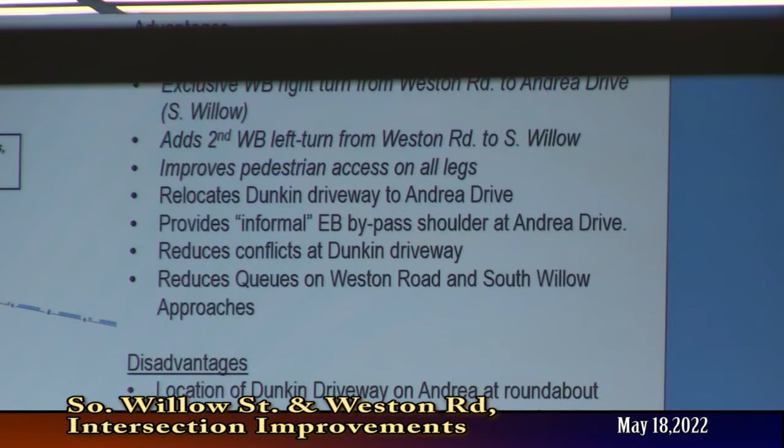Disadvantages, location of the Dunkin' driveway at Andrea Drive at the roundabout. Because we'd have to push it back further to get it away from the primary intersection here, this would cause some associated impacts with how Dunkin' Donuts utilizes their site for trucking deliveries internally. It would make it more difficult for them to function. Right now, their delivery trucks sit here, and if they sit here to get access to their building, vehicles would be plugged up and they couldn't actually access the site.

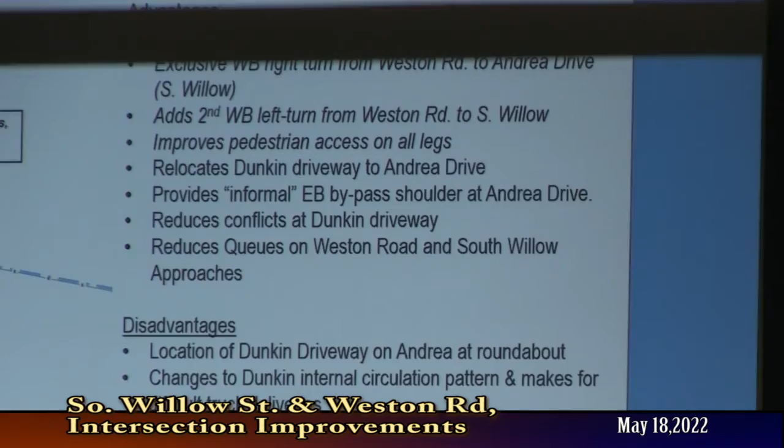Westbound queues on Weston will extend through the roundabout beyond Andrea Drive. That's up here. The above will not allow eastbound Weston vehicles to turn left at Andrea and will back up to South Willow. That's what I talked about for vehicles wanting to make that movement there. And there would be additional impacts on Mobil, Dunkin', and Brook Hollow condo complex. So for those reasons, you're not going to see this one move forward.

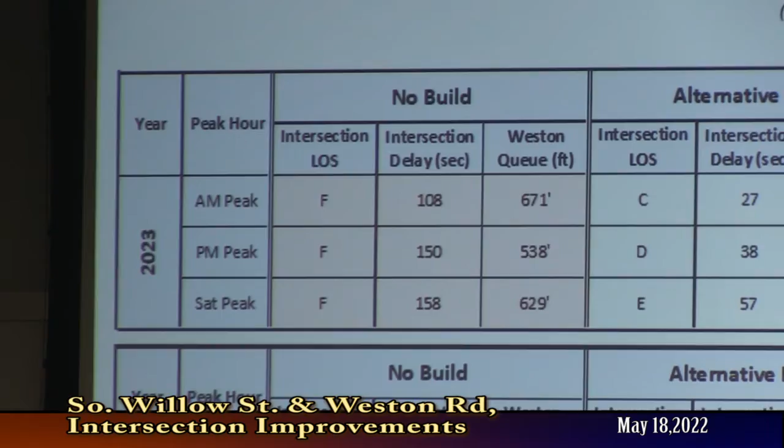So this is an alternative performance summary. I'm going to run through this, and it's a lot of numbers up here, and I don't expect you to read them all, so I'm going to point you to the ones that mean something. What this does is it summarizes some of the things that we look at as we design something like this, from intersection delay to queuing, stacking of vehicles, and overall level of service. Level of service is how we measure the performance of an intersection from A to F.

So this summary table puts all that in one place and shows you how each of the alternatives that we've evaluated function, how they respond to the needs out there. The only thing that I'll say is that we did drop alternative 4, the roundabout, because that one didn't really satisfy the purpose and need, really didn't do what we wanted it to do. It doesn't improve any of the conditions out there, while resulting in additional impacts. That one you won't see here.

What you will see is the no build, and all of these numbers I'll go over here. Alternative 1, 2, and 3. So alternative 1 had a left turn lane into the current Dunkin' Donuts site and a bypass lane. Didn't do anything to Dunkin' Donuts, left it where it was.

Alternative 2 had the median down the middle of Weston Road, which blocked off left turn access into Dunkin' Donuts Drive, but didn't move the driveway. Alternative 3 is the one that moves the driveway to Andrea Drive, provides a small informal bypass shoulder for people to get around sitting in Andrea Drive.

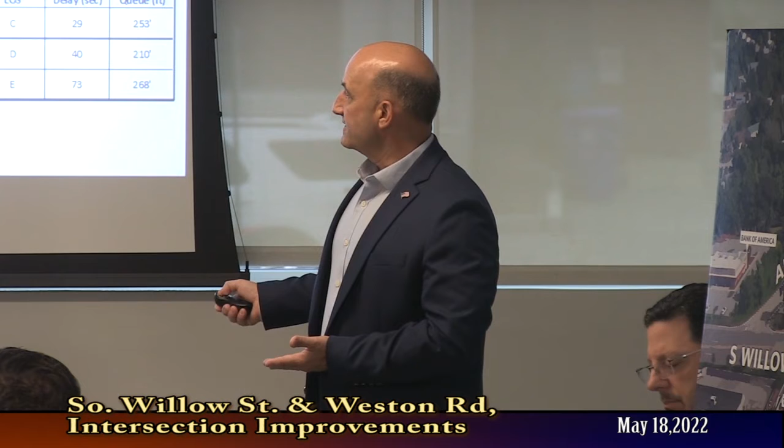What we also did is when we look at how intersections are going to perform, we look at it now for the opening year. When's the project going to be built? And here we assume it's going to open up in 2023. We'll look at the schedule in a little bit. I'll show you what that's going to look like. And what we also, for this type of project, look 10 years out.

So we look at traffic projections in the area, how we know land is going to develop, what the growth patterns are going to be in the area. And we make those projections in traffic movements, and that helps us determine how this thing's going to operate 10 years from now. And that's the no build. So we have the opening year of 2023, and we have the horizon year, the design year of 2033, 10 years from now. Right? So you're going to see no build here, and it's shaded in with a different color.

That becomes our measuring stick. So all the alternatives that we evaluate get measured against how the no build functions. Does it make it better? Does it make it worse? How much does it make it better? That's what we're going to show. So I'm going to focus just for this on alternative 3. Because alternative 3, when you look at these numbers, tends to be the best performing alternative when you look at it with respect to property impacts and what it's actually doing for signal and traffic operations out there.

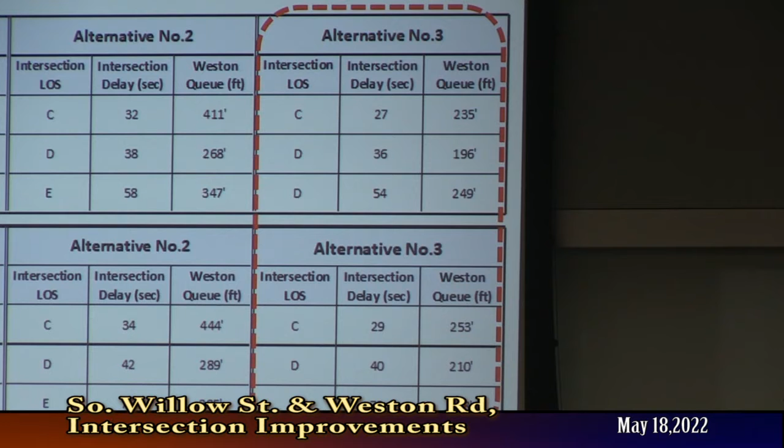So there's a whole bunch of numbers here that I'm going to run through. What we do is we match these in alternative 3. We did them for all of them, but I'm going to focus on alternative 3. We match them against the no build over here to look at what that performance measure is. So let's start with the no build alternative. So the no build in 2033, we're going to look 10 years in the future. That intersection operates at level of service F. It's failing. It's awful. Right?

Now, when you come across to alternative 3, you look at the level of service 10 years from now, and you're functioning at a level of service C, D, and E for the AM peak, the PM peak, rush hours, as well as the Saturday peak. And interestingly enough, the Saturday peak was quite high on this project. Shoppers, the mall. So when we look at these performance metrics here and match them against this is where we see great improvements.

The next metric is intersection delay. So it's an aggregate measure of how the intersection performs. And in this case, the existing intersection delay, overall intersection delay, not just for one leg, but for the overall intersection: AM peak 152 seconds, PM 171 seconds, and Saturday 213 seconds. That's high. So we come across to alternative 3 for those same metrics, 29 seconds versus 152, 40 versus 171, and 73 versus 213 for the AM, PM, and Saturday.

So this is the metric that we use, and you can see the significant improvements in how the intersection functions. Basically, you're going to clear traffic up a lot faster. You know, and that's important for this project, because remember what we're trying to do. We're trying to reduce emissions, reduce congestion, and improve traffic flow. So that's a measure that we look at that proves that.

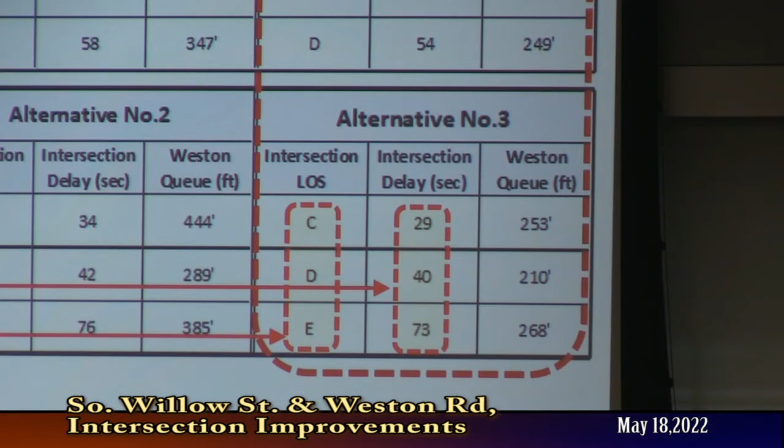The last one, and probably what's going to be most important to you, is going to be queuing on Weston Road. So now we're just talking about how traffic stacks up on Weston Road. So for the AM peak, that is estimated at 727 feet back from South Willow Street up towards Brook Hall. Okay? Now remember, the intersection with Andrea Drive is 150 feet up from the intersection of South Willow Street. So 727 feet is significantly further back. Right, so that's past our driveway.

Yes. Yeah, for reference, your driveway is about 500, so in looking at the conditions, we're looking at the average queue conditions. And we can verify that. Thank you. I think it's part of the selling point of this, if you look at alternative 3 in 2033 compared to where we are today with the no build, it still remains a huge improvement. So, I mean, that speaks very well for the whole.

That's a great point. I'll pay you later.

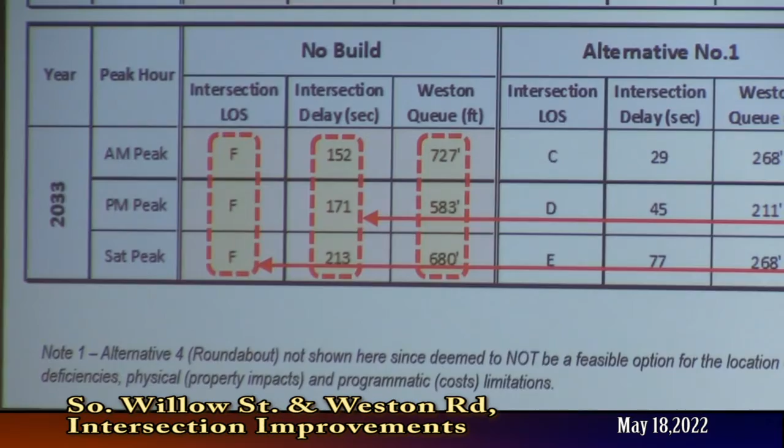All right. So continuing on with queuing. So queuing in the PM peak, again, this is Weston Road, 583 feet, and then in the Saturday, 680. So you can see, the AM and the PM and the Saturday peak are really the key performers. So that's the no build, and then we again take it across to alternative 3.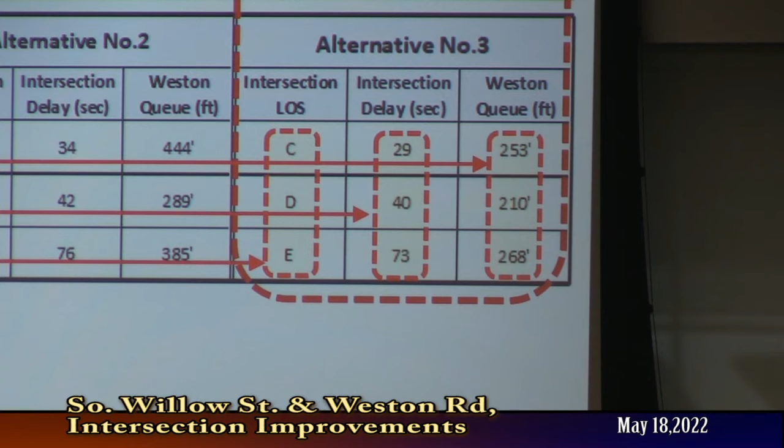You go from 727 feet to 253 feet for the AM. Significant change. Now remember, it's 150 feet from South Willow intersection up to Andrea Drive, so you're still stacking beyond that, but it's not 727 feet. It's a considerable improvement. PM peak goes from 583 to 210, and then the Saturday peak from 680 to 268. And again, this is 10 years from now, 2033.

So this is how we measure the performance of these alternatives. Based on this information and looking at alternatives 2 and 1 against the no build, alternative 3 became our preferred alternative. And this is kind of a better blow up of this intersection to show you what it looks like. And I'll go through it again just so that you understand what alternative 3 is.

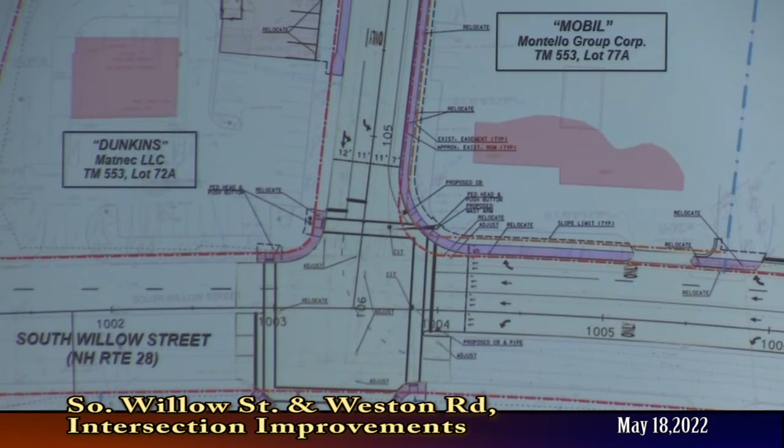Alternative 3 provides a soft right turn lane here, which would be signed back to above Brook Hollow and coming back here. Those people taking rights who wanted to go northbound on South Willow Street and avoid this intersection would take that. It relocates the Dunkin' Donuts driveway from Weston Road to Andrea Drive, reconfigures part of their parking lot. They're good with this.

The other thing it does is it provides those double lefts from Weston onto South Willow Street. It also carves in this exclusive right turn lane here to further relieve congestion on South Willow Street. Still improves the pedestrian crossings on all the quadrants. Rebuilds the sidewalk here against the Mobil station driveway and provides that lane and a 7-foot informal bypass shoulder. What am I missing? Okay.

So that's our proposed action. After all of that and the analysis that we took through, and I really appreciate you sitting through that. That was a lot of information. And again, it'll be on the city's website. You'll be able to look at it in more detail if you want. After all of that, the proposed action that we're recommending is this alternative number 3 here as the alternative that provides the benefits while minimizing cost and impacts. Questions before we move on?

Just have a quick question. On the walkway, how far up is that going to go on Weston Road? This one? The one, yeah. This one drops right here. There is no sidewalk that goes further on. Okay, so it's just up to the Mobil station, or is it a little past the Mobil? No, it stops at the driveway. It does not go across the driveway. That's what it does today. Oh, okay, I gotcha. Okay.

So, with the 2 left turn lanes, which will clear Weston quickly, it's going to dump an increase in frequency of traffic onto South Willow, which already kind of gets backed up as is. So there's going to be traffic light adjustment to try to get it in front and back? There will be, and the city also has what's called a signal performance measure project, where we're putting in additional detection and smart technology into these cabinets.

It's a separate project that is hopefully going out to bid. It's already designed and it's going out to bid this fall, so that should be in place before any of this goes in. So some of that technology will be able to monitor the existing queue lengths and adjust timings on the spot as well, and change offsets downstream to try and improve the flow on all of South Willow Street. So that's going in first, and this will come after it, and it'll be integrated into the system.

Okay, great. So I'm going to cheat here for a second, because we have a couple of abutters here, and I'm glad we do, between Dunkin's and Quirk. We have a couple of blow-ups that I think you'd be interested in that we threw into the slide deck.

And I'll come back to the rest of the stuff, I promise. So this is a blow-up of the Mobil and Dunkin' Donuts parcel here. So you can see in a little bit more detail what we're doing in the corner here. There's some signal equipment that has to go in here for the improvements that are being made. Here you can see a little bit better the existing right-of-way line in red and that easement line here in orange that the city already has.

And you can see with the right turn lane where we widened it out for trucking traffic here, we are cutting a corner a little bit wider here, which requires additional property beyond this easement line here. So hopefully that clarifies that a little bit for you.

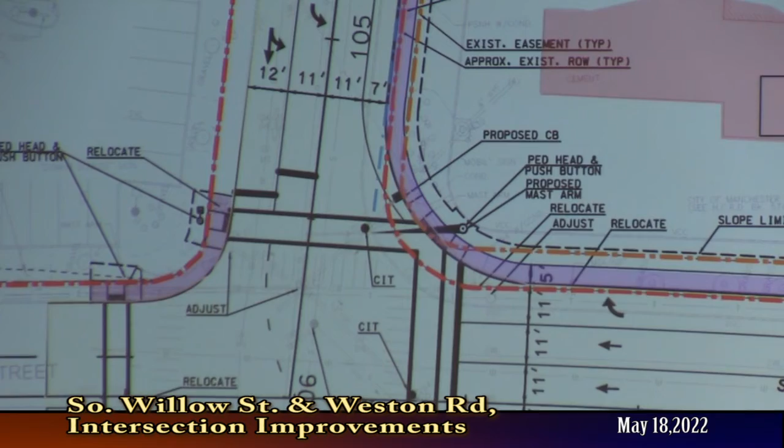There's also going to be some signal equipment sitting behind the sidewalk over here, so there'll be some modifications to the grass strip out there on the Mobil property, as well as the poles that will have to get relocated back here. So we've already been talking to the utility companies about moving those poles, and we'll just continue to speak with them about schedule and what that's going to be for them. You know, I know there's significant poles in front of the Quirk property, and we're talking to them about those as well.

All right, so this shows you what's going on up Weston Road as well. So you can see the existing property line here, and then the easement line here in orange. And you can see that the purple sidewalk, which is the proposed walkway, is all within that orange line. So it's within the easement that's been defined already. That was our goal on this alternative. But we still do have to look for property rights in this corner because we're widening that radius so that trucks and buses can make the rounding.

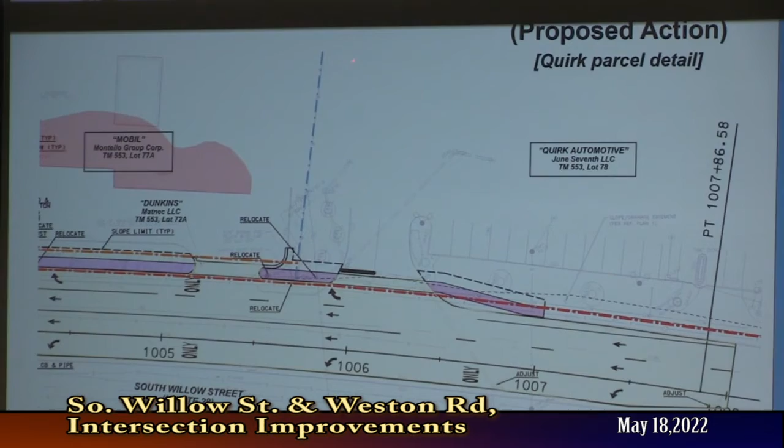This shows, that's one more. So this is the Quirk parcel. So this is the property line between Quirk and Mobil here. This is your northern entrance or your exit. You can only make rights out of this today. And so it's right in and right out only.

So what we'd be doing here is carrying the sidewalk across the driveway, pushing that back due to the right turn lane, and then bringing that sidewalk back into the existing one here just beyond the driveway. What that allows us to do is right after your driveway, cut in that right turn lane here and allow people to take that right onto Weston Road. All right. Questions?

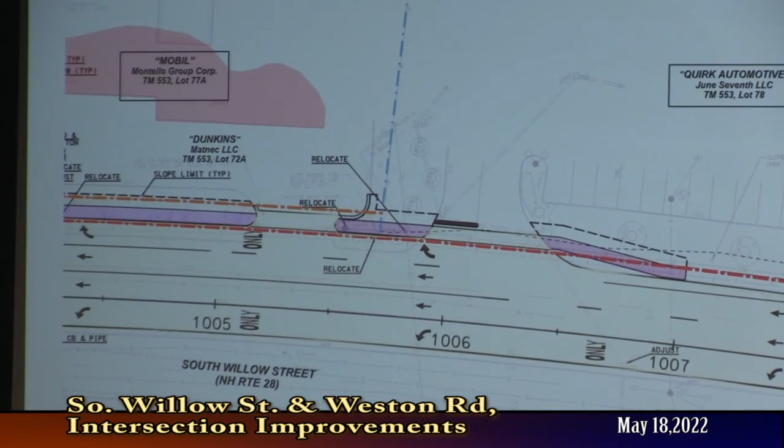Okay, now I'm going to go back. All right, so that's the proposed action. What's the next steps in the schedule? I don't know what that says. Next steps. So we have to finalize the engineering study following tonight's meeting. So we've been compiling all this information. It's going to go into a report that Kristen gets to read and mark up and make fun of us for. After that gets accepted by DOT and the city, then we'll be looking for a notice to proceed with preliminary design, meaning that we start looking at the final details of this.

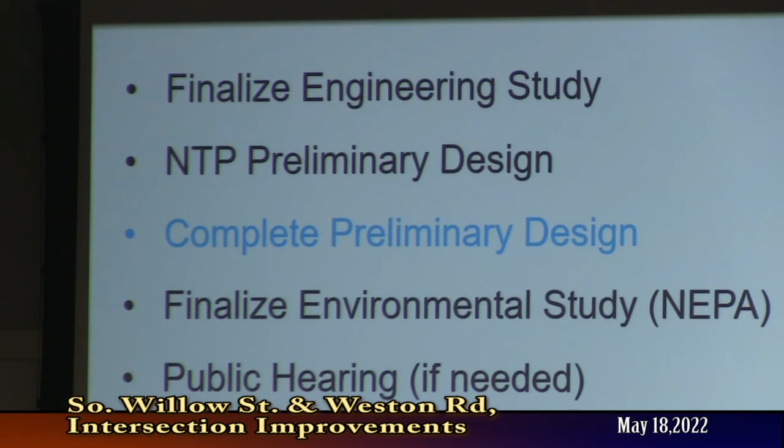And that also allows us to put a finer point on right-of-way needs as well, defining what those right-of-way impacts might be. We'll complete the preliminary design, and then we can go into finalizing the environmental study. The NEPA document is something that's required, National Environmental Policy Act. We're going to have to go through that process before DOT will allow us to move forward with the project. They have to be satisfied that we've met all of the environmental requirements of the project before they'll allow us to move forward.

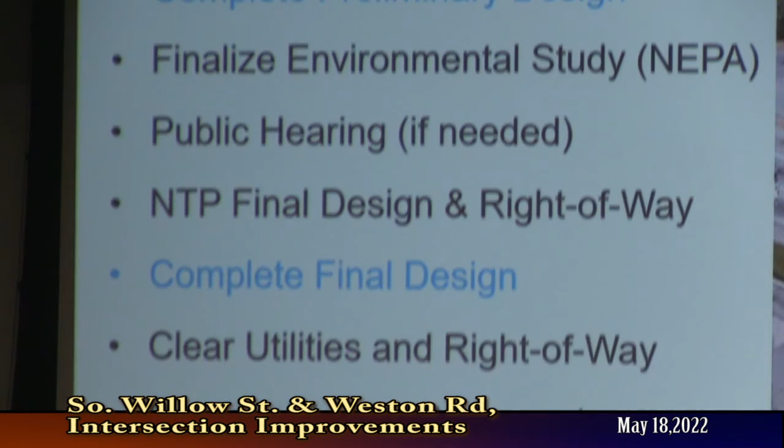And then we'll have another public meeting if needed, unless we can come to an agreement with the abutters on what is being proposed. Once we get through that, we'd be going into final design and right-of-way. So at that point, we'll have right-of-way defined. We'll know what the right-of-way needs are going to be. There would be appraisals done for those impacts, and just compensation would be offered at that point based on the outcome of the appraisals. And there'd be communication all along with the abutters.

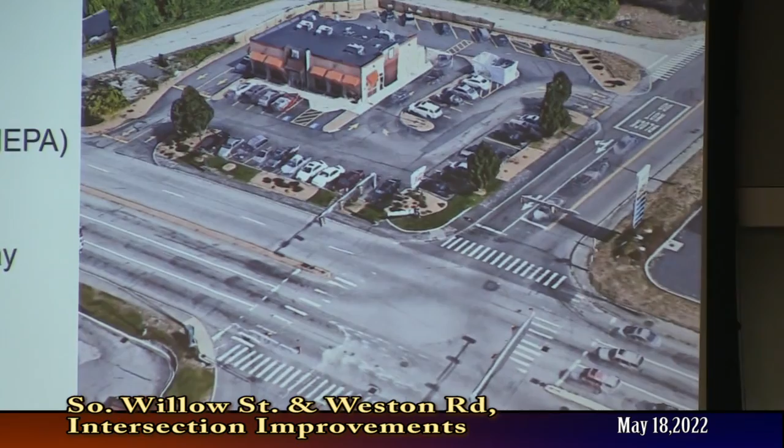And we would complete the final design, clear utilities and right-of-way, meaning that we actually have to put a certification out there that says that we're done with utilities. You know, they have an action plan moving forward. We've cleared the right-of-way. We have agreements in place with all of the abutters that we need agreements with. And at that point, we would be authorized to continue moving forward and prepare bidding documents and go out to construction. Our best guess on what that schedule is right now, pending all of that stuff happening, is final design efforts, spring of 2023, bidding and construction, summer of 2023, spring of 2024.

So you can see, go back to the chart at the beginning of the presentation where I showed you where we were in the process. We're still at the far left at the very beginning. Once we get through tonight, we'll be able to start moving a lot faster, assuming that we're good with moving forward with the preferred alternative. But we still have a lot of detailed design work to do, permits to acquire, and right-of-way to acquire. That's what takes so long between now and then.

So, that's all I got. Did I miss anything? Excuse me, the talks at the first meeting were about the air quality, which we're trying to improve at this intersection. Is any of the funding tied to that, if air quality doesn't improve or doesn't meet what they're expecting it to improve, or is that just? As long as it shows an improvement in delay and air quality, that's the end goal. As long as there's some improvement, it will still be eligible for the project. If you go back to that chart that showed the differences in delay reduction, that itself basically is a quantitative analysis that air quality will improve.

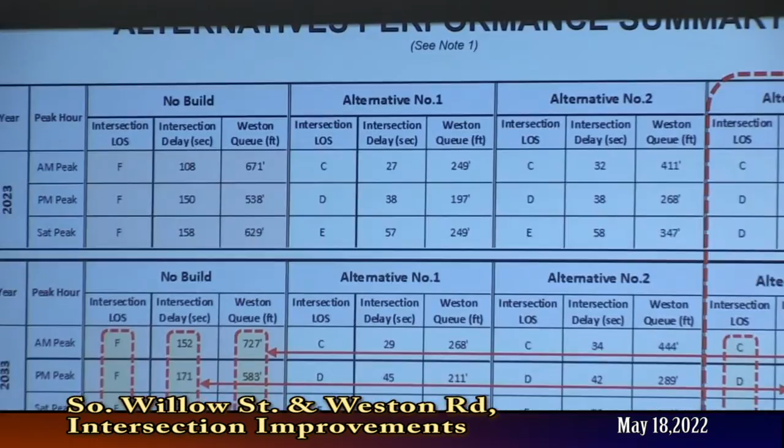And the complete funding is federal for this? It's 80% federal with a 20% city match. And the city has budget for it? Yes, we have most of our match so far. There were some fees that different developers, as they developed along South Willow Street, have contributed to the planning board. So over half of the match was provided through the planning board as a fee that they collected along the South Willow corridor, and the city will fund the remainder when they need it through the CIP program when we get closer to construction. So next fiscal year.

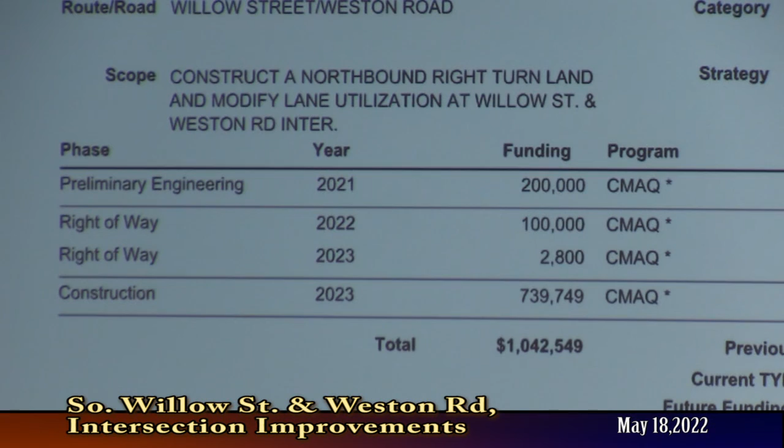So the slide up in front of you now is the same thing that we presented at the first local concerns meeting, and that shows the funding levels for the project. We're still evaluating the actual estimates, but what we're seeing right now is they're in line with what the funding is. This shows that the total project cost is just over $1 million, and this shows you what the construction and right-of-way costs might be. So this is all publicly available on DOT's website. And again, that is the full cost, so the city's cost is 20% of that total, so about $200,000. Is that using today's cost or is... That is what we're looking at. Yes. Yeah, that's a real challenge right now. Yes, it is. Bids are all over the place with supply chain issues that are going on. It's like an 8% inflation.

It's a real challenge. Can it become cost prohibitive if this gets postponed, or is it where it costs what it costs? Well, the city would have to figure it out, and there's ways you can do bid alternates or not repave all of this, can we add a right turn lane and patch it, things we don't want to do, but if we have to, when we get down to it, we don't have the money if it's that crazy. Or, depending on what money the state has, sometimes they'll contribute more with their state match if we contribute more. So when we get there, we would figure out those details. It's a great question. Our job now is to finalize details on this and put dollars to it. What we're seeing is that we're within range of the estimates that were provided originally, but a year from now, I'm not sure what the bidding field is going to look like. Hopefully it comes back down. You folks are seeing it with what you deal with on a daily basis, and it affects everybody.

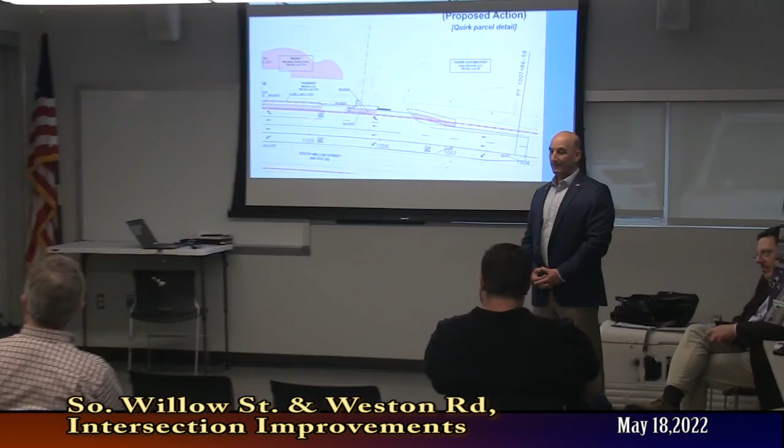More questions? All right. Keith, anything to add? I guess just from what you heard from the alternatives, as you noted, the preferred alternative, we're looking at alternative 3. Do you agree or do you disagree? I agree. Yeah, I agree also. I think that of the alternatives, it's also going to have the best positive impact on accident reduction, because I think you described it as an expected intersection kind of thing, so that people will presumably slow down and be more cognizant that there could be cross traffic, which they don't seem to know now. Driver recognition, correct. Yeah. Anything else?

All right, so, more information will be posted on the city's website. Yeah, so this presentation, give us a little time. It won't be there tonight.